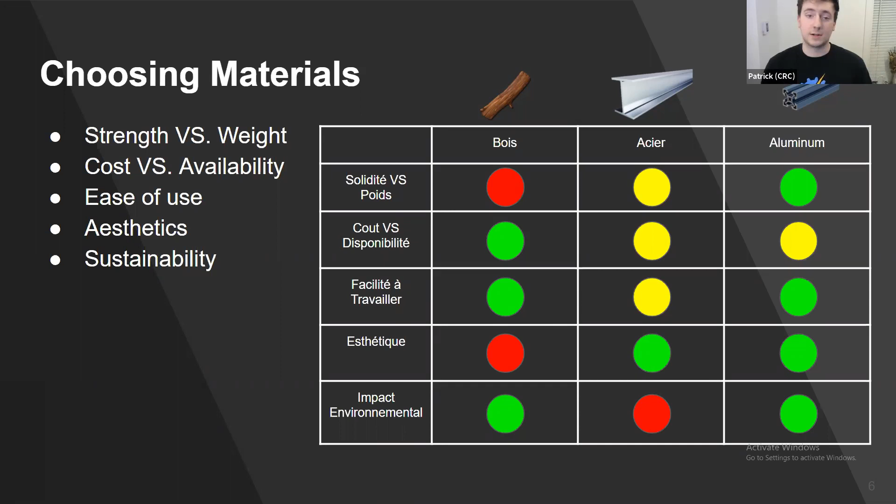It's very easy to work with - in most cases, if you have what you need to cut wood, you can cut aluminum. A lot of aluminum can be cut with very simple tools. It's a soft metal. Aesthetically, like steel, it makes a very pleasing robot - it looks nice and judges usually appreciate them more. And from an environmental aspect, aluminum is infinitely recyclable, so it's a great material if you're looking for something environmentally conscious.

So for finding tools, these are the two things I hear most when people talk about their robots: that they don't have a big budget, or that they don't have the tools that another school may have to put out a great robot. I think a lot of people have a misconception where they think cheap tools are bad tools. That's not the case, not all the time anyway.

For example, Mastercraft, a brand available at Canadian Tire, has a lifetime warranty on most of their tools. They're cheap, and you can find them on sale very often. With that lifetime warranty, if they ever break, you can just go to your local Canadian Tire and get a new one pretty much on the spot. Another similar brand is Power Fist, which also has a lifetime warranty and is available at Princess Auto. It's a more car-focused store, but you can find it in Quebec and other parts of Canada.

The other thing is you don't always need power tools. A lot of people think they need a drill press, a circular saw, an electric sander, and things like that to build a good-looking, solid robot. That's not true. What's important is the effort put into it more than the tools that you have.

You can get away with hand tools, but if you don't have the budget for expensive things, you can get really good quality out of tools like Ryobi, DeWalt, and the Mastercraft Maximum line of electric tools. Ryobi, for example, has something like 200 different tools that fit the same battery, so that's a very good option for a budget-conscious school. They even have a battery-powered soldering iron, which can be very useful in a competition like this for repairs.

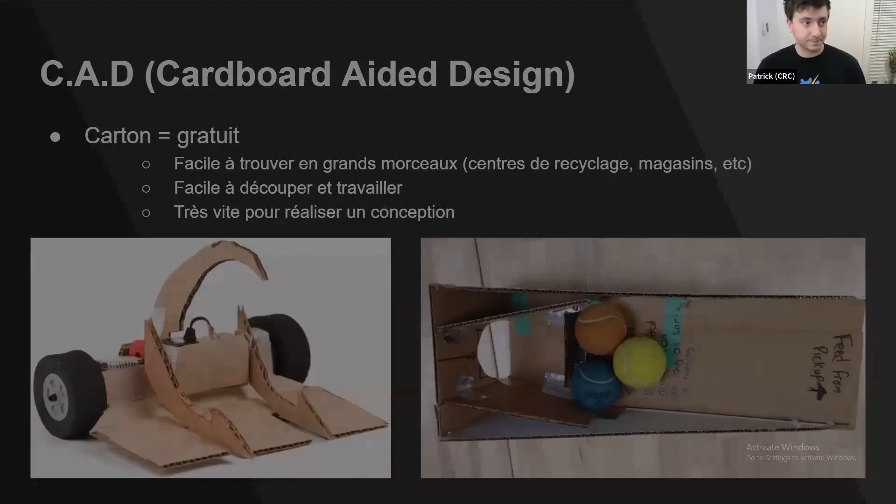Okay, so I'll go over the tools now. There are 5 categories of tools that you'll see most often when doing robotics: cutting, measuring, assembling, clamping and holding, and wiring tools.

For cutting tools, the most common one you'll see is a chop saw or a bandsaw. That's the saw that you cut when you pull down on, or the saw that you can push your object through. The alternative, if you're looking for a good budget option, would be a hacksaw or a wood saw, something with just a fixed blade that you run back and forth by hand.

Then you would have your press drill, the alternative being an electric or even a hand drill—I've seen people drill holes by hand—and a good drill bit set. Out of all of this, I think the most important thing would be a good drill bit set, because the price difference between a cheap set and a good set isn't that large. You don't need a cheap set with 600 bits; a good quality set with 50 bits will get you much further. You won't have to constantly be breaking them. Cheap bits don't drill as well, they take longer to drill, etc.

In cutting tools, we also have a utility knife and scissors, good for cutting cardboard or Lexan, things like that. And then a metal file and sandpaper. When working with metal like aluminum or steel, you're going to want to sand and file pretty much every edge you cut, because it gets to the point where working with the material isn't as fun—you're more often getting small scrapes, small cuts. It's safer for everybody and also looks nicer on the finished product.

Measuring tools: these robots aren't exactly NASA specs, so you don't need anything complicated. A measuring tape, a ruler, and an adjustable square with a bubble level on it are more than enough for 99% of what you're going to be doing. Sometimes you want a protractor as well, but besides that, we don't need exact measurements—if they're within a 16th of an inch, it's generally fine.

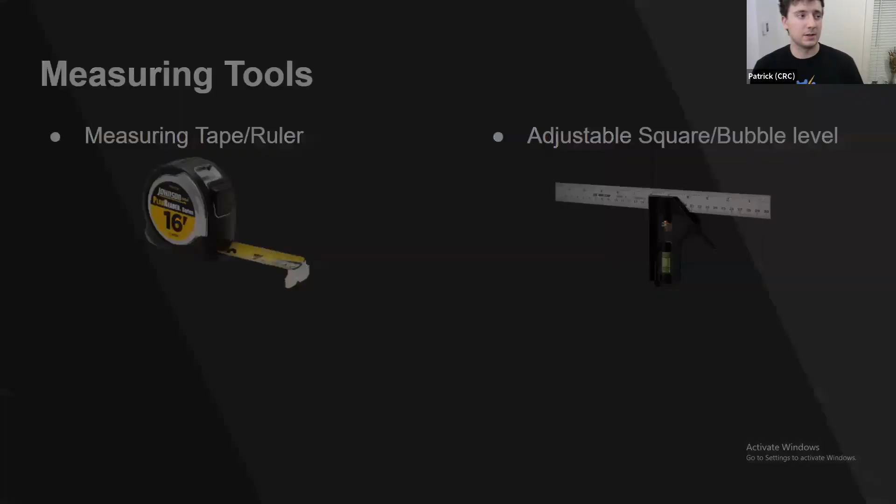A basic wrench or socket set will also help a lot with the construction of your robot, because you're going to be using a lot of nuts and bolts. A hammer and a mallet are also great, because these can be used not only on the robot but also with the kiosk for when your cuts are not exact or you need to just push something into place.

And then Allen keys and a basic screwdriver set. These are also great because with the robot, generally a lot of the fasteners you'll use will have Allen heads or things like Robertson square heads. So having a good variety of them is a great idea, and they're not expensive to purchase either.

For clamping tools, a bench vise is a great option. It's a helping hand, great to put pieces into to assemble them without worrying about them falling or scratching. The alternative would be various vice grips, which come in hundreds of different styles, or a C-clamp. Finally, a corner clamp can be useful for making sure your robot frame is nice and square, a proper 90-degree angle. As a bonus, the C-clamp and corner clamp can also generally be repurposed for kiosk work.

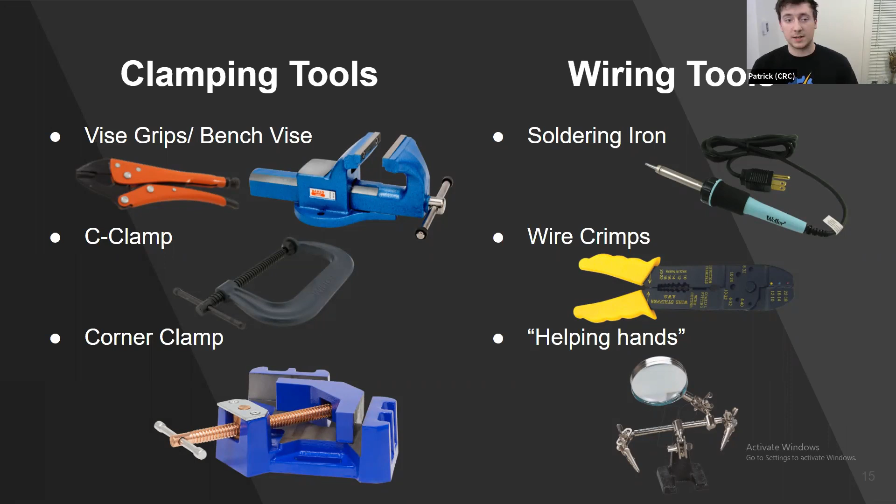One of the more important sections would be wiring tools. This is something you don't necessarily think about when planning your robot, but wiring is probably one of the most important aspects. A good set of wiring and soldering irons, wire crimps, a pair of helping hands, and things like that will help a lot, especially a soldering iron if you're going to be soldering connections. They're not that expensive, so having 2 or 3 sets is a good idea. It helps more people work at once, makes it faster to put your robot together, and makes it easier to teach somebody when you don't have to share the same tools.

Just a quick bit of basic tool safety. Keep in mind your tool should be in good shape. It shouldn't be dirty, shouldn't have a cracked handle or a broken point. It should be the right size - there are different sizes of tools like screwdrivers, saws, and hammers. If you're using a giant screwdriver for a tiny screw, use something else if you're able to. It's a good idea to make sure tools are clean and maintained when you put them away, because nobody likes using a dirty tool, and cleaning and maintenance will usually show you if the tool is in good shape, giving you a chance to notice cracks and other issues.

Only use tools for what they're meant to be used for. A big flathead screwdriver is not a substitute for a chisel - that's the biggest error I see.

Pointy tools, just like you were taught in kindergarten or by your parents, like scissors, should always be carried with the point down, not in your pockets, because if you trip and fall, it's not fun. If you have something like an X-Acto knife, make sure the blade is retracted when you're not using it. I often see fully extended X-Acto blades left lying on the floor where it's easy for somebody to step on it or put their knee on it.

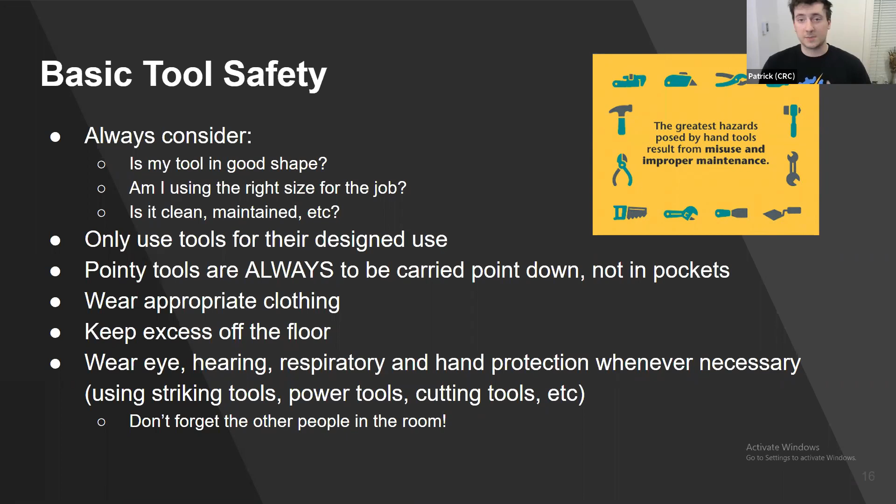Finally, wearing the proper personal protective equipment - things for your ears, eyes, and hands like gloves - is important whenever you're using any type of tool. But don't forget the other people in the room. Just because you're safe with your personal protective equipment doesn't mean the guy two feet away from you is also safe without it.

Every team should have a basic first aid kit. We go over this in the rulebook, but basically a pack of adhesive bandages, some gauze, a little first aid manual, a cold pack, antiseptic wipes, things like that - all good things to have on hand. Also make sure they're not expired, since they do go bad after a certain amount of time. Generally, if it's 3 to 5 years old, it's a good idea to replace the kit.

So now we're going to move on to linking components. Essentially, when you're building your robot, you're going to end up having to put pieces together. That's a given. There are certain questions you should ask whenever you're getting ready to put two pieces together, whether on a small scale with two pieces of metal, or attaching a subsystem to the main body of your robot. The first question is, how are you going to do it? Is the connection going to be direct or indirect?

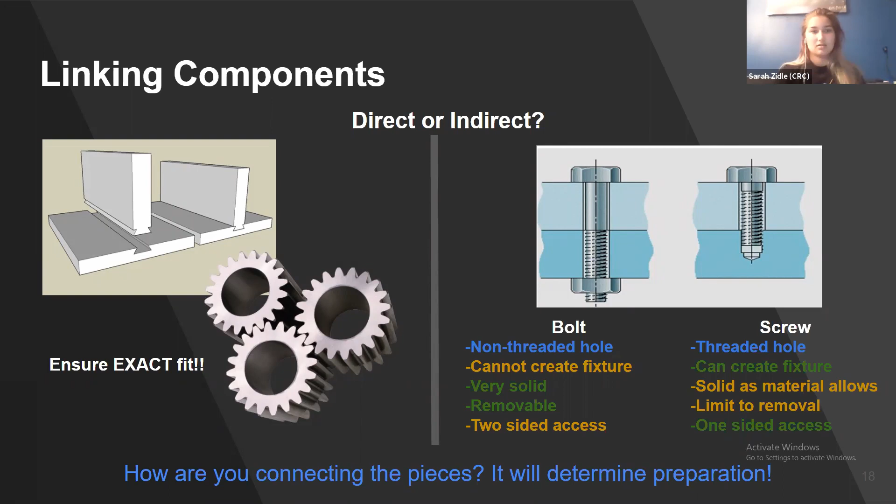For components that are flexible or rigid, this is talking about the actual material itself, not whether it's supposed to move. I gave two examples of each. The first on the flexible side is coroplast, that corrugated plastic - a very flexible material. Whether it's supposed to move depends on its function. One of my robots had a flap where we wanted the plastic to move, and on that same robot another spot where the plastic served as a wall, so we did not want it to move. Flexible versus rigid is based on whether that material is going to bend, or remain completely solid the entire time.

When you have materials that can bend like coroplast and you want to attach them to something else, especially something stronger, you might want to use reinforcement. As you can see with the coroplast, with that screw there is a washer to spread out the pressure, making sure that when you put your screw in, you're not just making a bigger hole that the piece will go right through and come off - because you don't want to get that junk penalty and you don't want your robot to break.

Another example is mobility and friction. When you're putting wires on your robot, you want to hold them down somewhere. Make sure that whatever they're held down to is not going to create too much friction on those wires, especially if you're bunching many wires into the same holder, whether you're using a tie wrap or a proper one - it depends what you're looking for. Make sure the friction isn't going to eat away at the plastic, and that heat in that area combined with friction isn't going to wear it down, because if two wires end up stripped and come into contact with each other, that could create big problems and a big boom. You don't want that.

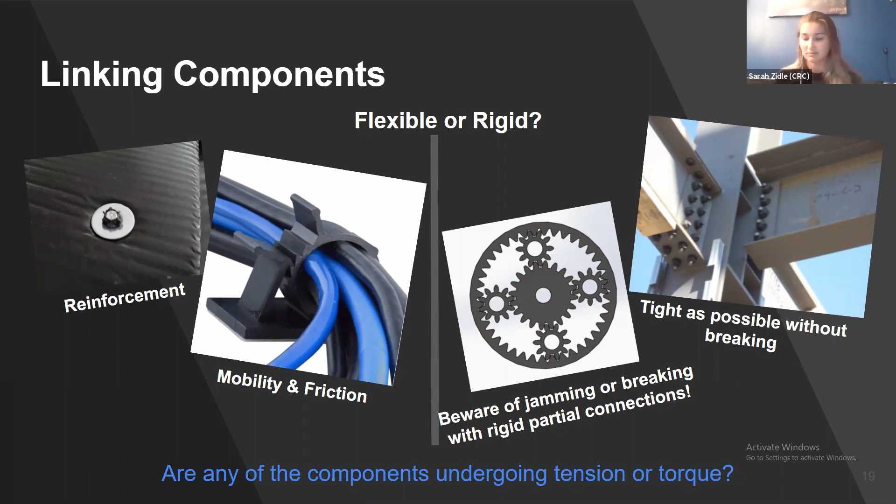The next one is complete or partial. So this is what I was talking about with, are your pieces moving? This has nothing to do with the material itself. It has more to do with the function of your pieces.

With complete links, they're usually found more in your framework, in your robot. So when you're building your base, you want to make sure those pieces are not moving. When you're making your systems, those are more likely going to be your partial ones. A good rule of thumb is that partial connections will come with a motor because you want them to move, and the best way to make something move is with a motor, unless it's something more automatic.

When it comes to your framework, you want to make sure that your frames or structures are very solid, so make sure the pieces don't move or wobble. Test them a little bit, push them from every angle, and make sure they are staying in place the way you intended.

When it comes to partial links, like with that linear slide, when you have a piece going up and down, you want to make sure the parts are not sticking and that they're not eroding onto each other either.

In general, if you notice that your pieces are sticking a little too much, check to see if there's any glue or anything that needs to be washed off. And if they need extra lubrication, you can use WD-40. That's like the golden standard, anything you can use to get those pieces grinding less against each other.

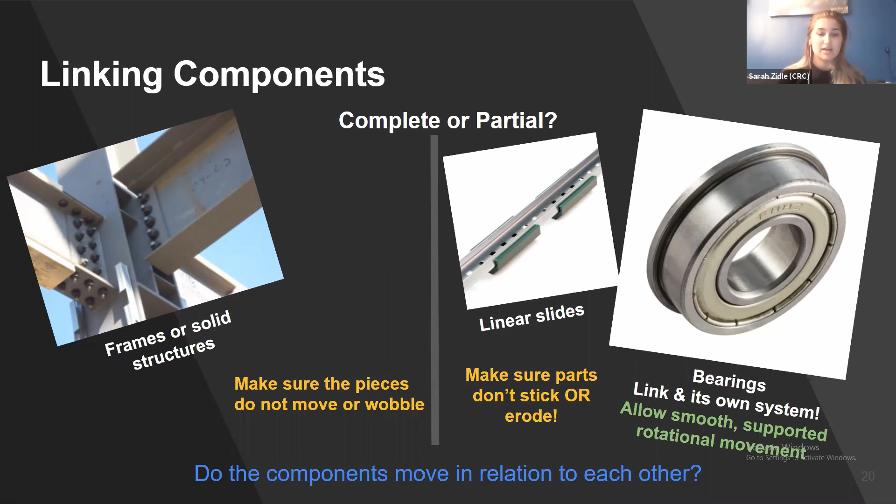The next one we're going to go onto is removable or non-removable. These are the ones where maintenance comes into play. One thing I want you to always consider is, do I need access to something that is in this system or behind this system?

A lot of people think, okay, this one I have access to, it's all good, and then they don't realize there's something behind it that could break, and now you can't get to it. You're trying to wiggle through with all of your tools and it's just not working. When it comes to non-removable connections, I'm giving you two examples, one mechanical and one electrical.

With non-removable links in mechanical, you're going to see welding. As Patrick said, some metals are better for welding. I don't recommend doing it with aluminum necessarily, or at all, but you might weld some of your materials. Make sure you're doing it properly. If you are, I recommend having it done by a professional, especially if you're in high school.

Don't weld on your own, don't try to do it. And please do not weld with solder, it's not going to work, don't try it, it doesn't do well. If you are soldering, it should be for wires only.

One thing I want to point out is I did include a picture of proper soldering, and there's a reason you solder end to end instead of lining the two wires up side by side and twisting them like you would with a wire nut.

The reason you do that with soldering is the solder creates a very solid joint, and your wires are flexible. If they're head to head, the wire stays straight, so there's no tension on the end with the solder. Whereas if you do it side to side, the two ends are going in different directions, pulling on those sides, and your wiring is more likely to break. So if you're planning on soldering, make sure you know the proper way to do it and that you're making these considerations.

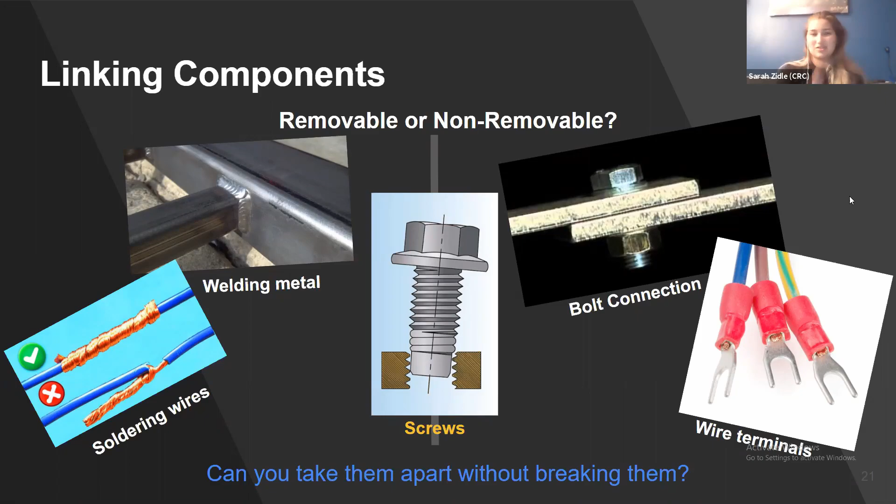When you're building, a couple things I want you to consider: first, the order of assembly. Especially when working with removable and non-removable links, please don't work on something and put it on your robot when something behind it isn't done yet, or when you know you won't be able to continue something you hadn't finished. Look at your design when you're building, make sure you're not blocking yourself, and consider the orientation - think about which side you're putting the bolt and screw on.

Can it work in another orientation if when you're putting it on the robot, something else is going to be blocking your access to it? So make these considerations in your design. And then while you're building, reevaluate constantly and say, okay, am I going to be able to access this if something goes wrong?

Another thing, do not leave your wiring to the end. A lot of people do this. They say, okay, I'm going to figure out wiring at the end. It's one of the easiest things. Wiring can be easy, but only when it's done well and when it's always being thought of. So as you're going along, make sure you're thinking, where are my wires going to be in all of this?

Because when you have systems that are going into extremities, if you have an arm on your robot, if you have something that's moving along a shaft and has an extra component at the top with a motor, what is happening to those wires? Are they getting stretched out? Are they getting coiled? Can they get stuck in something? So you want to be keeping them out of the way of your moving systems and always have a little bit of leeway so that if something goes wrong, you have that little extra, but keep that extra out of the way. So tie it and leave it on the side, but have it there just in case you need it.